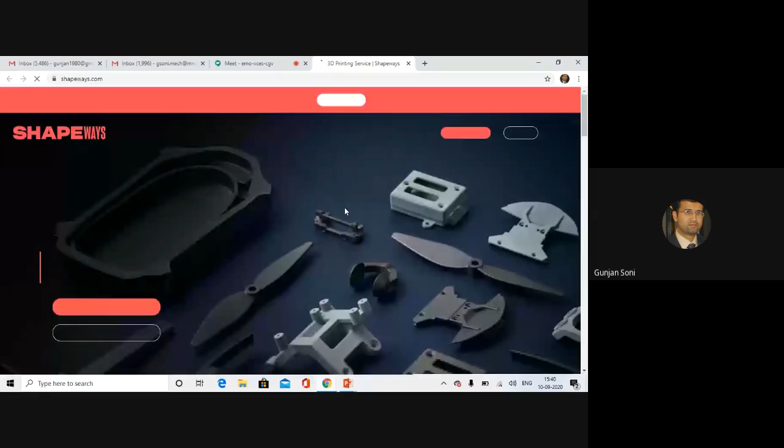So they are providing online 3D printing services. Now it's quite interesting. If you look at the solutions, the types of solutions that they provide are additive manufacturing, rapid prototyping, design services. They can even make STL files for you. You can upload your STL file and then go for production. The applications, like medical applications, what kind of things they are making in medical applications, you can see that.

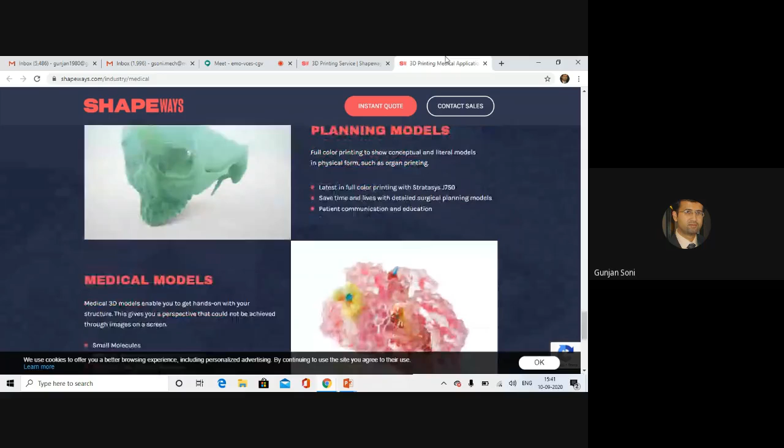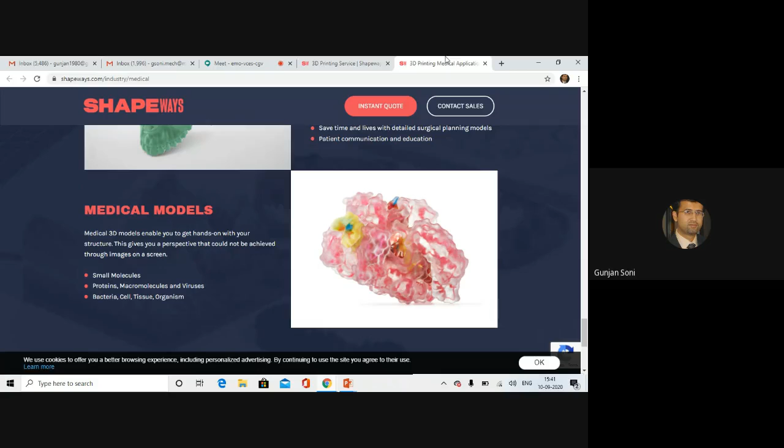Education training: like you might have seen the skeletons which are lying in the medical schools, so you can actually get them made over here while you're not actually working on that real skeleton. Medical models could be made in order to get better understanding. So these are some of the applications on the medicine side. Consumer side, what are the applications?

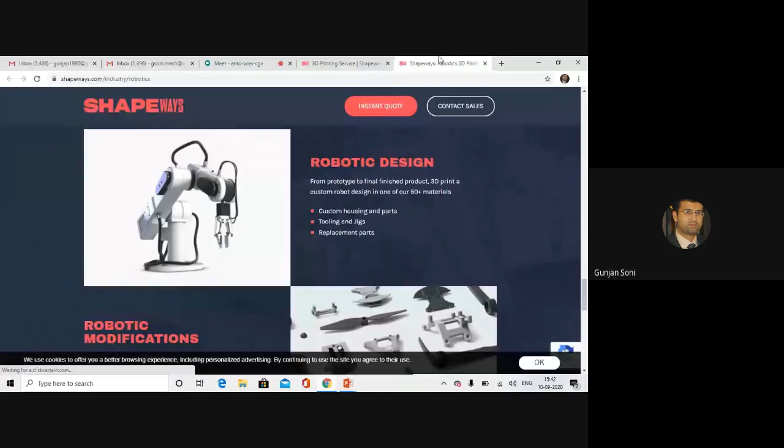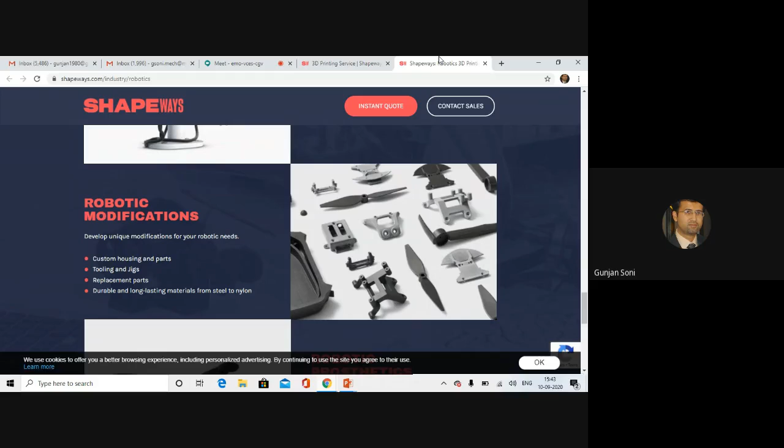So now look at the robotics one, where you can see the custom housing and parts, tooling and jigs, replacement parts. So in maintenance, it plays a big role nowadays, rapid prototyping. So robotic modifications like custom housing and parts, tooling and jigs, replacement parts, and then robotic prosthetics, just like human prosthetics, and many more.

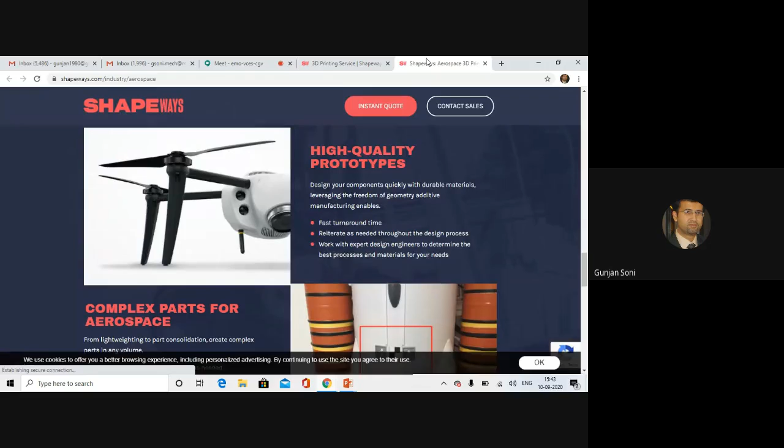Even in aerospace, you can see over here spares, high quality prototypes where we can get fast turnaround time, and then you can have expert design engineers, which these people provide. So manufacturing engine components and all the different kinds of spares, right?

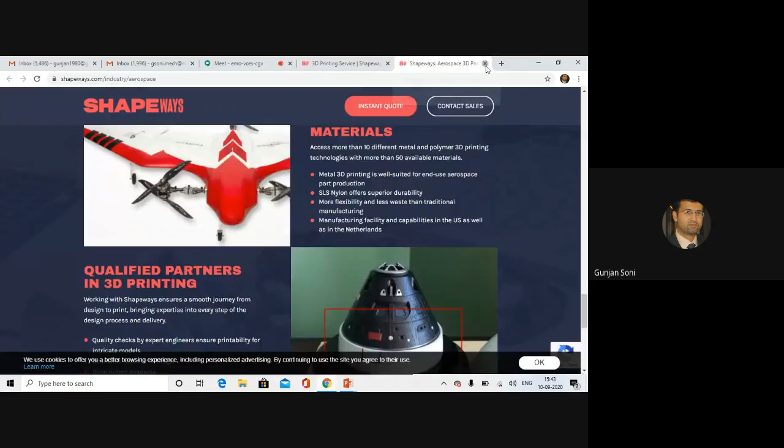Now what these people are doing is you can get a quote. In order to get a quote, upload a 3D model. They are telling you that the STL file or whatever format you have, you can upload that and go ahead with it. So we'll be exploring this side of the presentation.

These kinds of websites are called 3D hubs, and they provide a platform for distributed 3D printer owners. Now, what is the meaning of distributed over here? It's not like I have a machine and I'm only catering to the local market. Rather than being local, I can go global by joining a 3D hub where I'm the printer owner and I can make the product for anyone, right?

But there are many complexities which come in this kind of situation, and how Internet of Things and cyber physical systems are helping these 3D hubs to come up with a new business model, that's what we are going to see. So they can post their machine information on it. Like I've got a 3D printer, I'm going to put my information on it that I've got such and such 3D printer with such technology and such capacity. And then customers can access my services online.

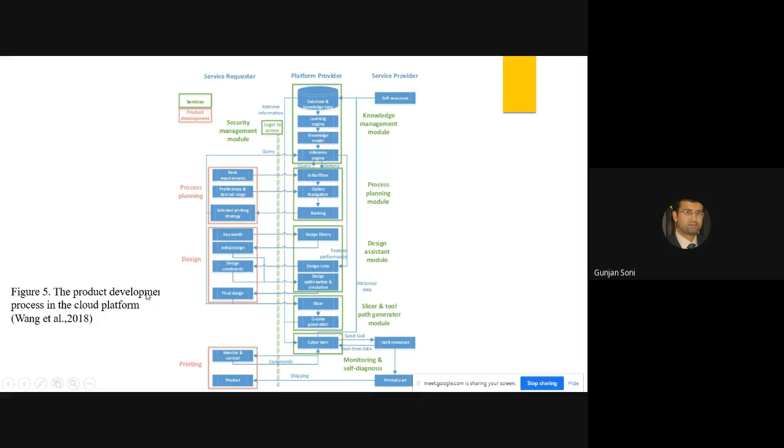It's going to ask from the knowledge management system over here what should be the basic, what should we do, how it has to be produced. These are the basic requirements. What are the preferences and desired range, selected printing strategy. So these all could be done in the process planning.

Then comes the design stage, where in additive manufacturing, your design for additive manufacturing is very much different than your traditional design for traditional manufacturing process. So it is important that we tell customers to understand what are the new constraints and new possibilities. It can even be produced in a better way. So in that, there is a design library over here. You can see that there is a design library where a customer can use keywords to search for similar designs, just like in group technology, and get some inspiration from those designs. And they can even modify that if they wish to.

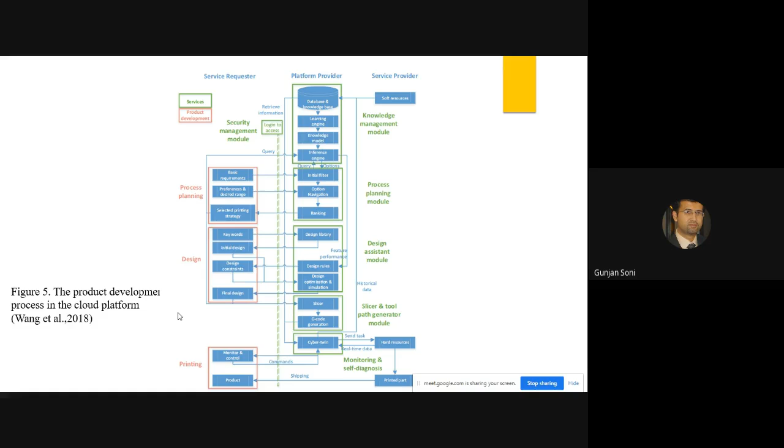So I hope this part is clear. Then we go to cyber physical 3D printer.

One of the fundamentals in this type of platform is allowing cyber service providers to directly share their printers on the cloud. Now IoT technologies enable this by connecting printers, sensors, and different types of tools via the internet.

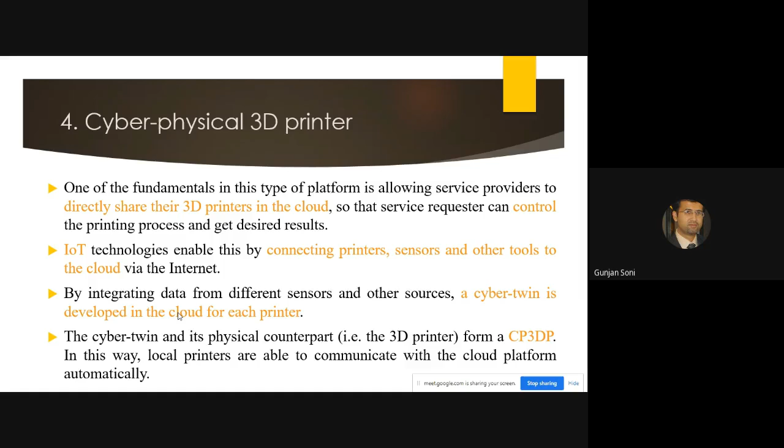They call it CP3DP, where cyber twin and the physical counterpart together form CP3DP. So there is a communication protocol which has to be established between the cyber twin and the physical printer.

In order to do this, a communication protocol is required. This protocol standardizes the definition of the information and communication which is going to happen. Of late in market, there are two popular protocols, MTConnect and OPC UA.

These popular protocols are standards for communicating between devices. It's a part of the cyber physical system. The information flow in the OPC UA protocol is given over here.

In the information flow of this type of protocol, a server is located locally with the physical system, like a 3D printer. So you got a server associated with the 3D printer, and this is also linked with the data source of the cloud.

Now, to ensure security during the information transmission process, the server can encode whatever communication is going on between the client and the server. It is all going to be a secure process through XML or binary encoded data.

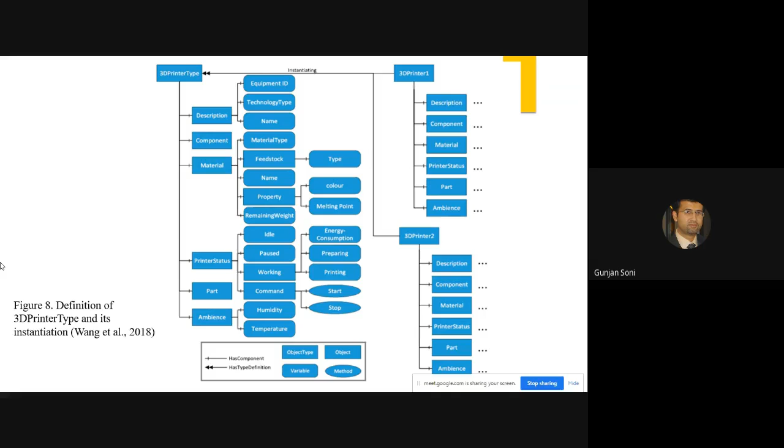Now, self-diagnosis is a major part where IoT is going to play a major role. A 3D printing task often takes time, and we need to find out if there's going to be a failure or not. It's a kind of prognosis we want to do, so there shouldn't be time wastage or unnecessary capital investment. If the cloud platform is able to analyze the data from the sensors and figure out if there's an impending problem, it can be dealt with.

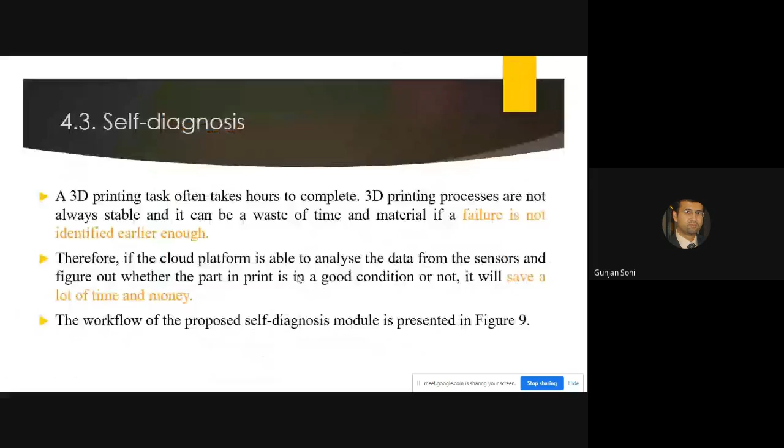Now, problem classification. Additive manufacturing processes could be grouped into two types. What is this problem classification we're talking about? It's part of the data analysis, where we see this problem - how to decide yes and no, how to go toward no and how to go toward yes. Additive manufacturing processes are grouped into two types based on whether the part in print can be visually monitored or not. If it can be visually monitored, good enough; if not, we need sensors.

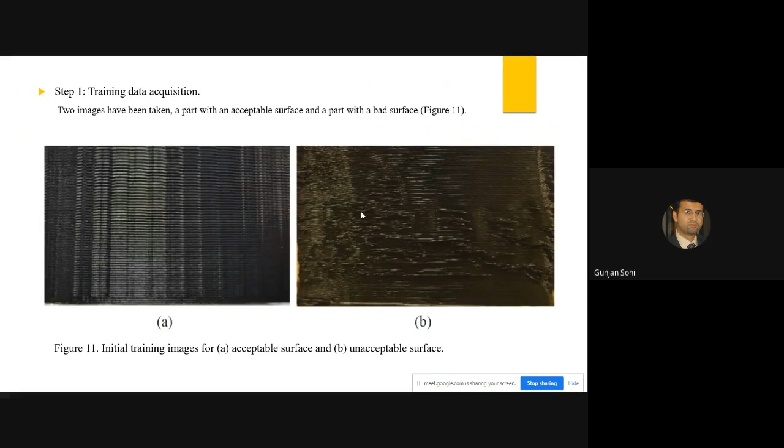So to verify the usefulness of neural networks for surface defect detection, neural network models could be developed. Over here, you can see this image indicating what I want in my 3D printed object - so this will be my desired output. While this surface finish I'm getting with a certain combination of the parameters - whether this is acceptable or not, whether this combination of parameters is acceptable, I'll get to know soon.

So step 2 is data pre-processing. Now what generally happens is you feed a lot of images into the neural network. Images could be of different pixel sizes, so we need to standardize the pixel size - let's say 100 by 100 pixels, smaller pictures, and feed them in.

So we want to make the neural network learn that you can get such surface finishes, and whether they are acceptable or not. So this is the supervised learning that we have to do.

Now here color is not important, so RGB images are converted to grayscale images so that bandwidth could be reduced. If you upload a colored picture, or even in a cloud you are using colored pictures, the bandwidth required to process that would be higher, because all the information has to be transferred online - because the printing is going on somewhere else, and the processing is happening at the cloud, and this data again has to be transmitted to the user. So you have to also consider reducing the bandwidth requirement, also the computation power.

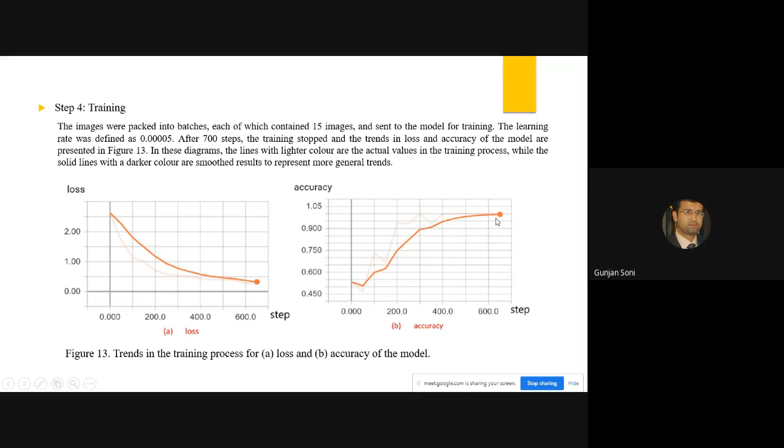Okay, so this was working. Now with this, when I upload a file and tell it to print, when the printing starts, my system is automatically going to tell whether the printing is happening well or not. If it is not, it will automatically seek the solutions in the knowledge base and will let me know that now the process is modified and we are going ahead.

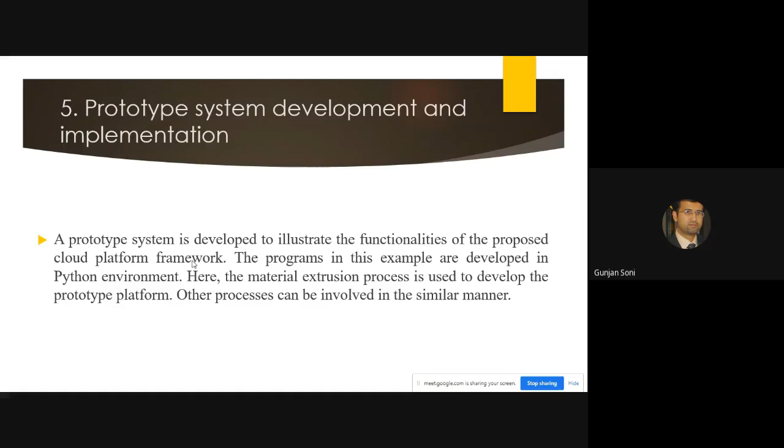In this, two extra sensors are installed: one in the form of a camera to capture the printing process information, and a load sensor to track the remaining weight of the filament. And the information model is developed in XML. The protocol used is the OPC UA server protocol, and the Raspberry Pi is coded using a free OPC UA library, which you can also do in Arduino.

So you can see over here in this picture the process planning functionality. In the process planning, firstly the 3D printers are connected to the cloud and are listed for the customers to explore. So this particular 3D printer is shown on the cloud. They can check the status of the printer and directly choose one if they know which one they want to use. If not, they can define the attributes they care about, and the platform will define a series of optimal options with different trade-offs. So it is going to interact with the customer.

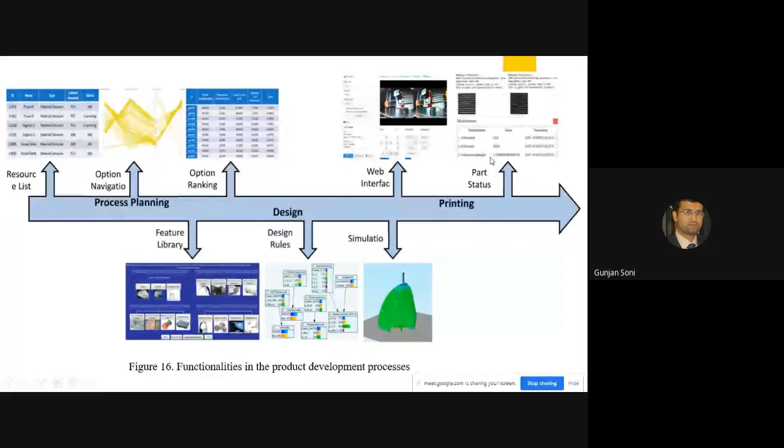And then subsequently there is a feature library also, where you can think of modifying your design if required, and with the given option ranking with certain option, according to the Bayesian networks, how much accuracy can I expect in the product which I'm producing. The web interface will give me the picture of the part being produced. Before that, I can also see the simulation of it, and the part status is coming over here in the printing stage.

So in the conclusion, we can see how information communication technology, artificial intelligence with neural networks being part of it, and cyber physical systems, the IoT, are used in the IoT environment to make the cloud platforms smarter and more efficient for customers in the rapid product development process. The proposed platform, what you see, is able to provide customers with useful information, based on the information they have, instead of asking them to provide more detail, which can be actually irritating for a customer. So if you are a customer, you would rather like to have options rather than telling what you want, because you generally don't know what you want.

So 3D printers in the IoT environment can directly receive tasks from the cloud, and the knowledge model is used to define the capabilities, and becomes the mind of the complete process. It gives the options, different parameter configurations, to help customers in finding out the best services. Then a new dimension of flexibility on machine level is introduced to allow customers to use the printers with more complex requirements.

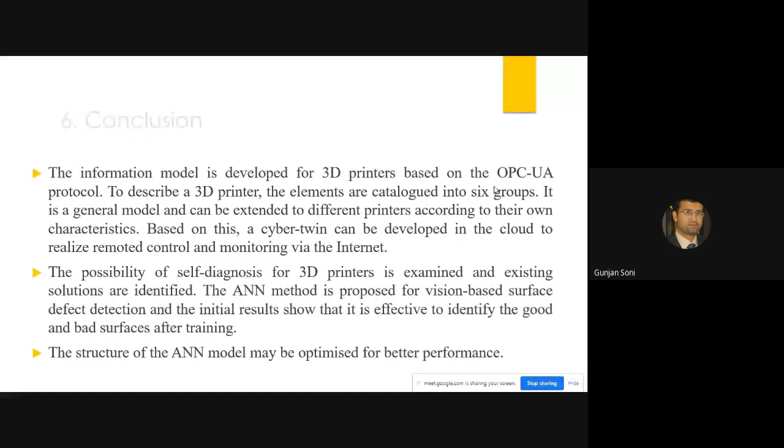There can be more sensors. It's just a small setup with 2 sensors. If you want a detailed picture of the process, you can have even more sensors with the Raspberry Pi. A neural network is proposed for vision-based surface defect detection, and initial results show that it is a good technique. Here, the neural network can be further optimized for improving the performance of the whole platform. So this was what we have discussed about the IoT enabled additive manufacturing platform for rapid product development.

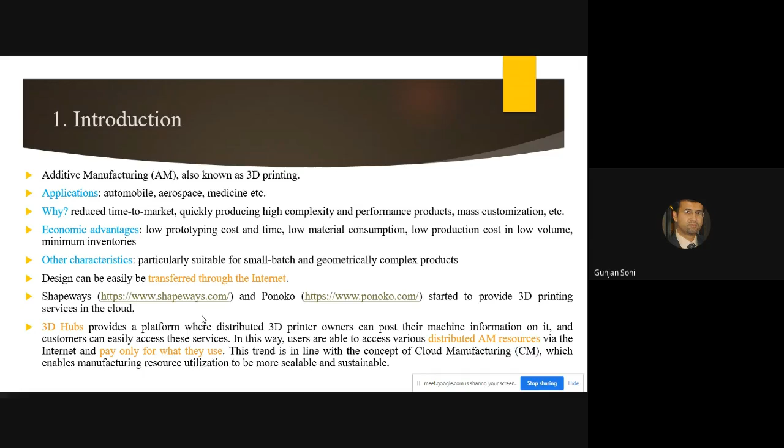So I would suggest you go through these websites, and you'll get to know where people are moving. Right now, not much competition is there in this area, and people can take it up; it could be a startup also. And actually, you need only to provide cloud services and some good people with good data analytics knowledge and machine learning. You can build up these great things.